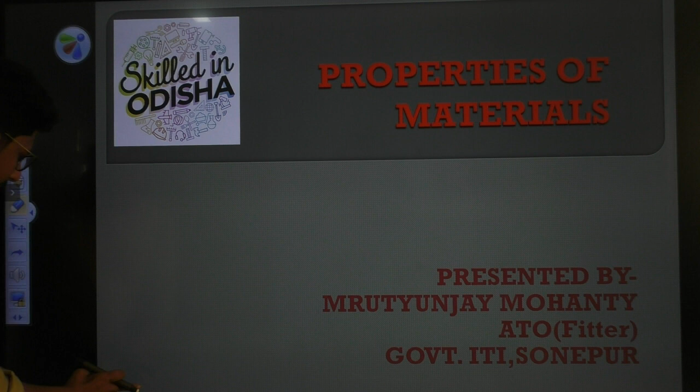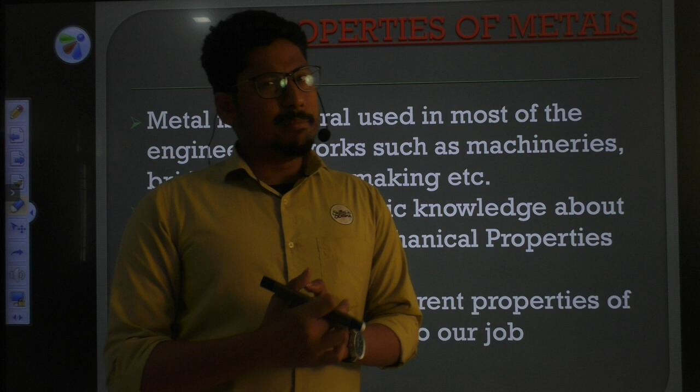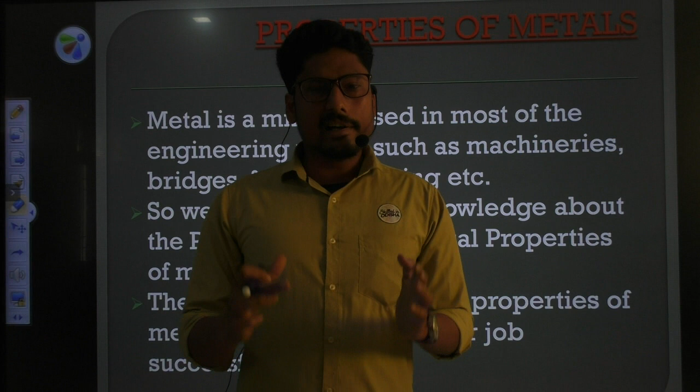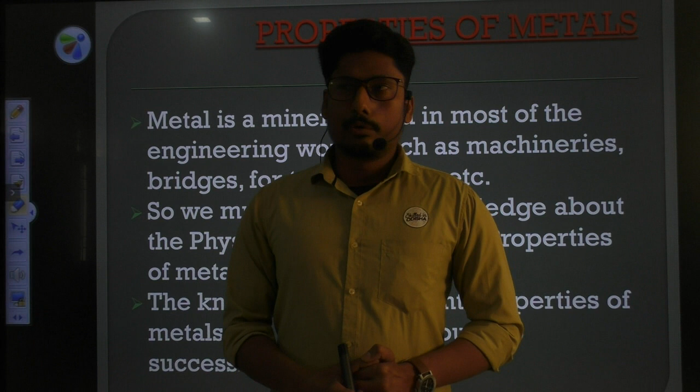Before going to the properties of material, first we have to know what exactly a metal is. A metal is a mineral used in most engineering works - bridges, structural applications, fabrication work. In all fields, we use these metals as important applications in engineering. So the knowledge about metals and their properties is very much essential for a student, a trainer, a trainee, to clarify all doubts regarding the engineering application of material.

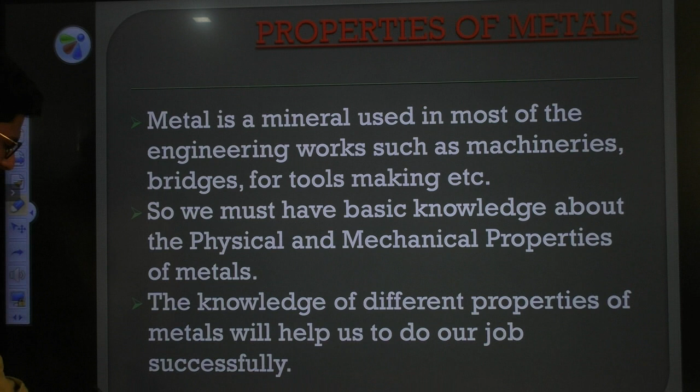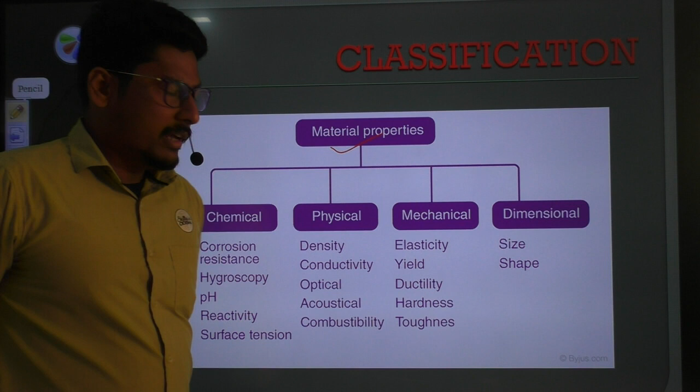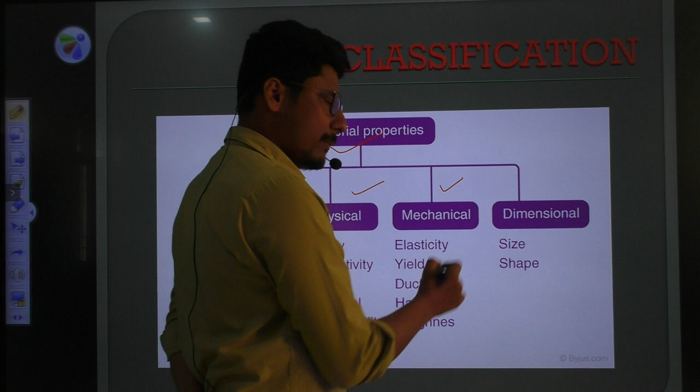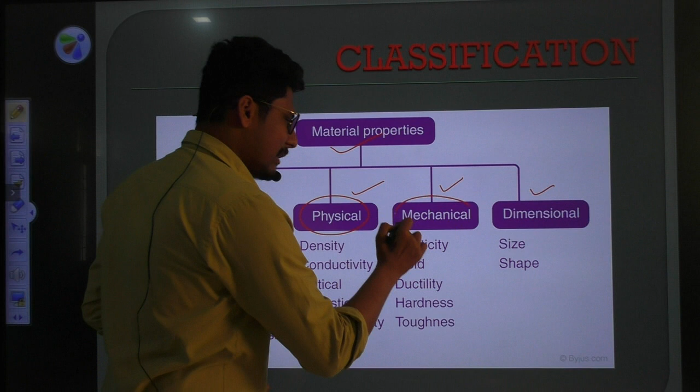So let's come to the important classification of properties. Properties of materials are classified into 4 important categories: chemical properties, physical properties, mechanical properties, and last but not least, dimensional properties. In our subject we deal with all these properties, but in the specialization of fitter trade, we are very much concerned with physical properties and mechanical properties. So in this presentation, I will discuss all the physical properties, then we go for mechanical properties.

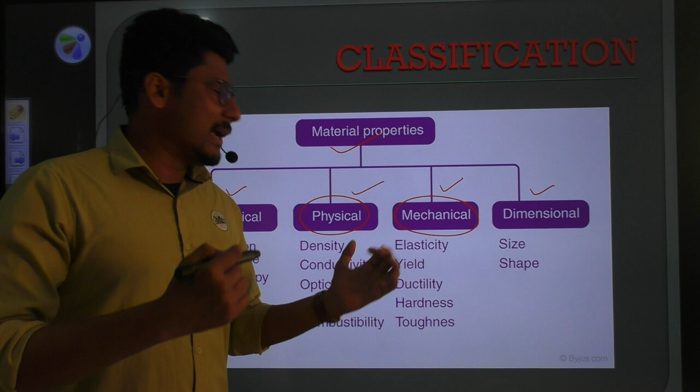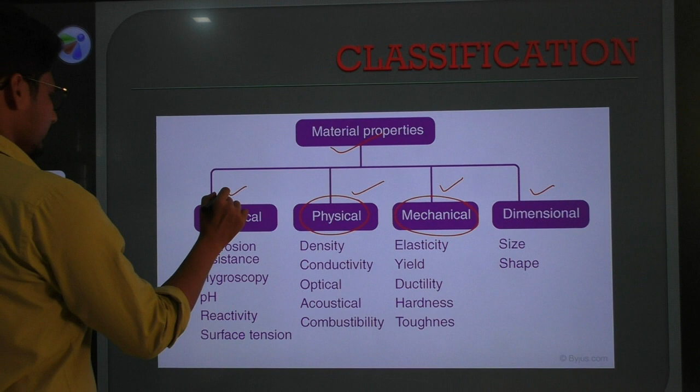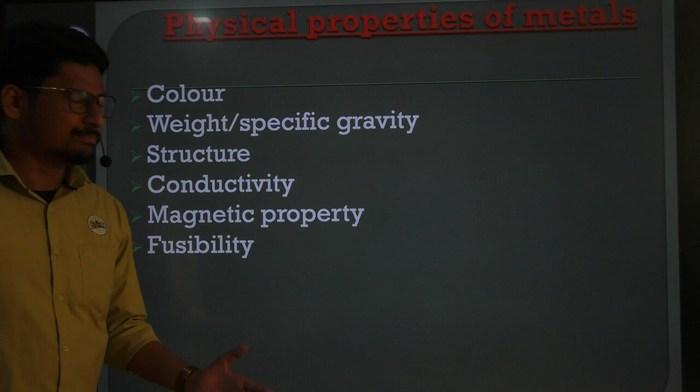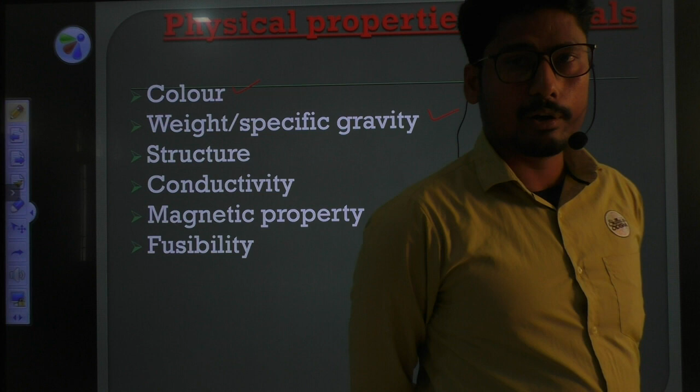So let's come to some physical properties. Some important physical properties are: number one is color, second is weight or specific gravity, third is structure, fourth is conductivity, and fifth is magnetic properties and fusibility. Let's discuss these properties one by one.

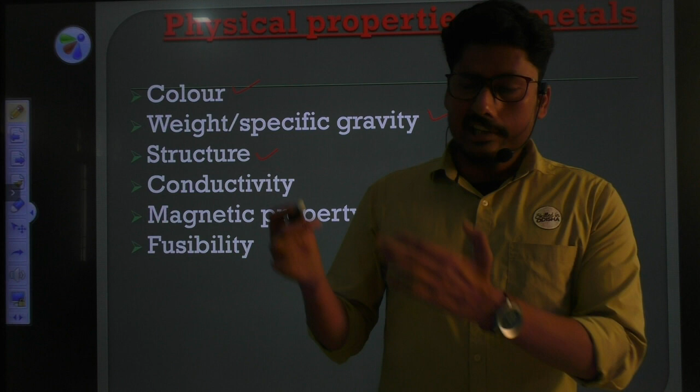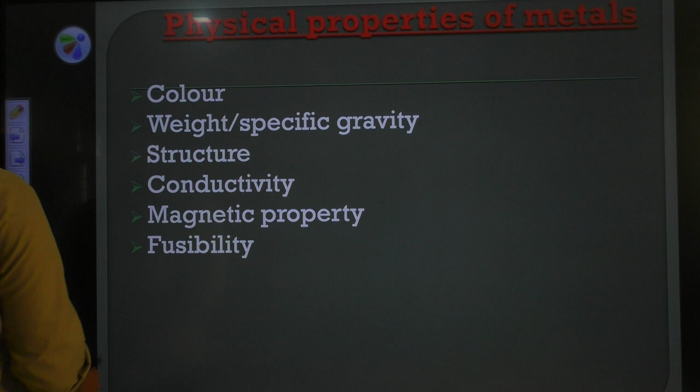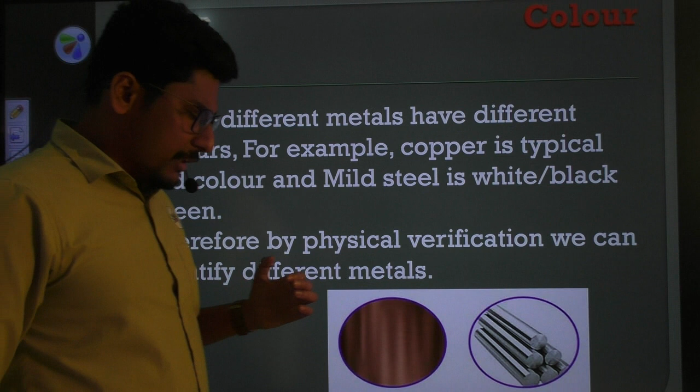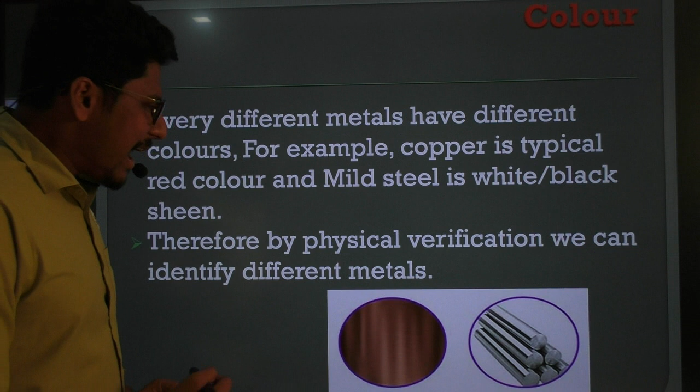First, come to the important property which is color. That means different materials possess different colors. You can see the color of copper compared to the color of mild steel. So according to the color, you can identify the material. This is the main theme behind this property.

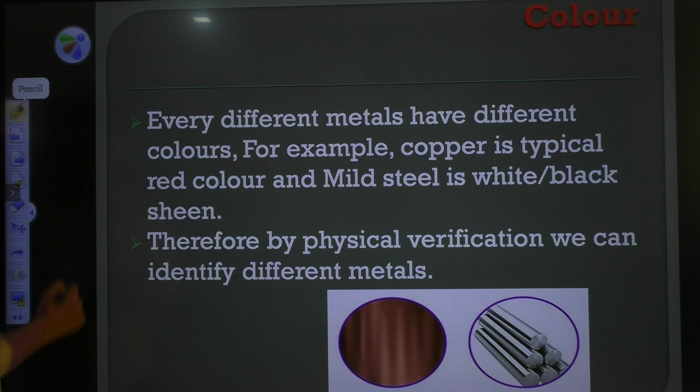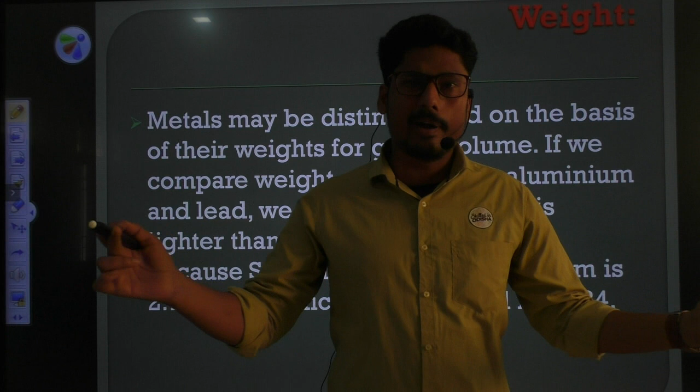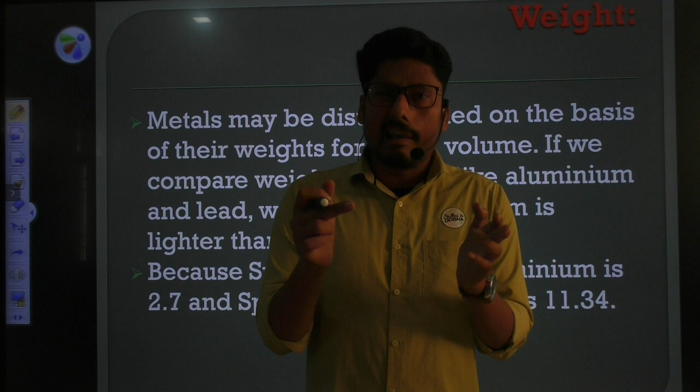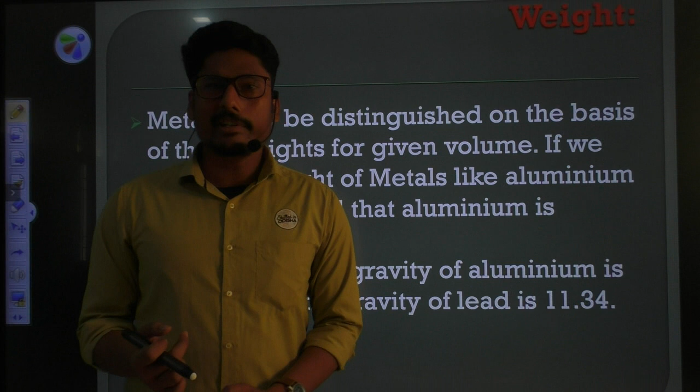Next, come to weight. The material may be distinguished or classified according to weight. You can compare aluminium and steel - aluminium is quite lighter than steel. So you can identify the material according to their weight. Why is aluminium lighter than steel? The main reason behind this is specific gravity - the specific gravity of aluminium is quite lower than that of steel, so it is lighter than steel.

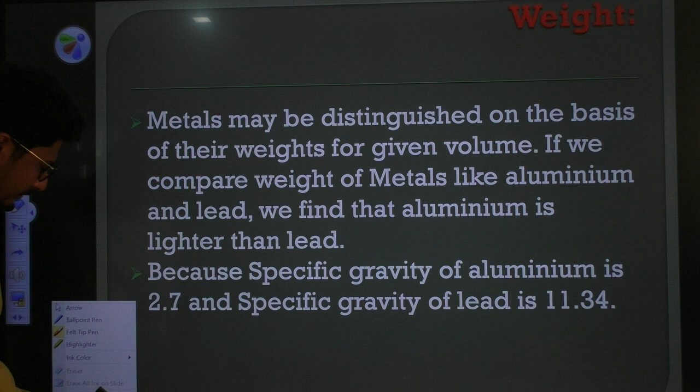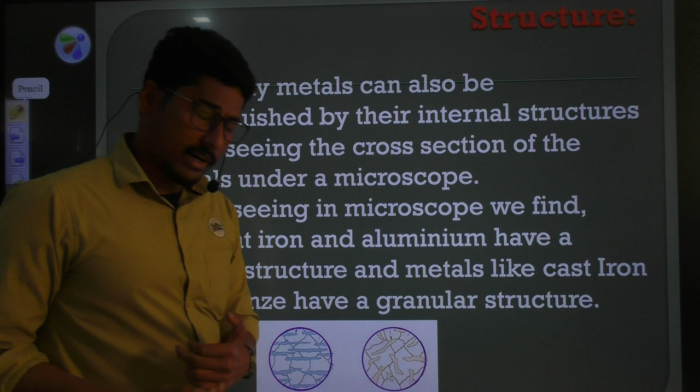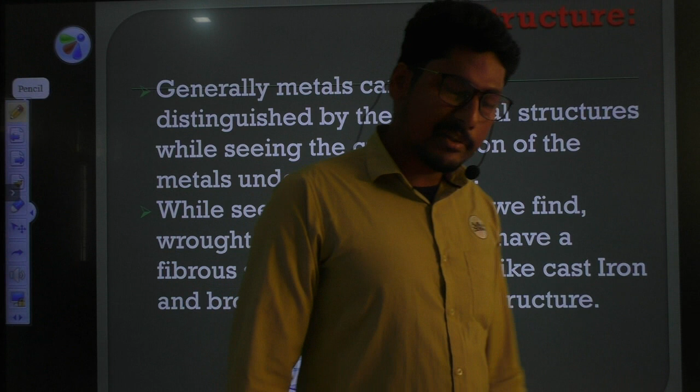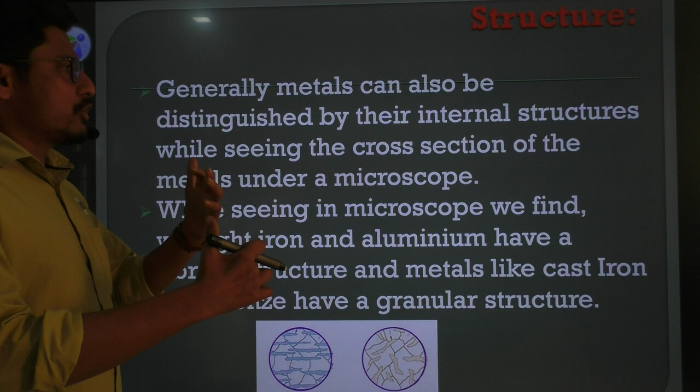Next comes the important property called structure. In microscopic view, you can find that the internal crystal structure of material is different - different materials possess different crystal structures. For example, in case of wrought iron and aluminium, it is fibrous structure, but in case of cast iron, it is granular structure. This granular or fibrous structure can be viewed by microscopic view only. So according to structure, classification of material can be done.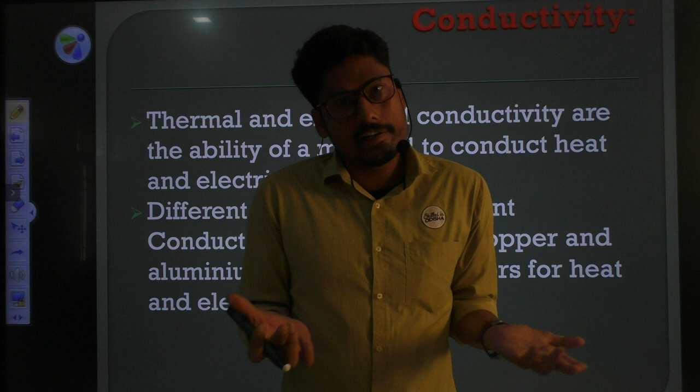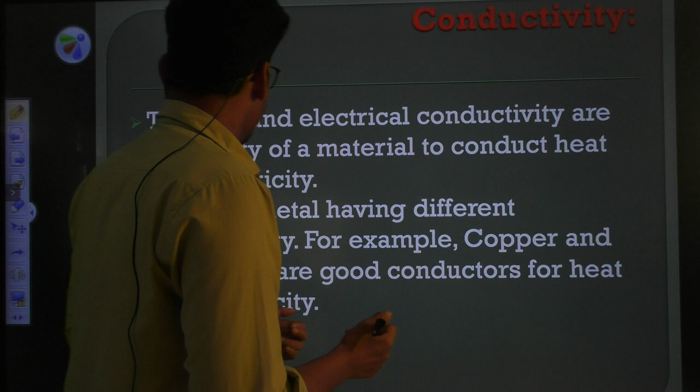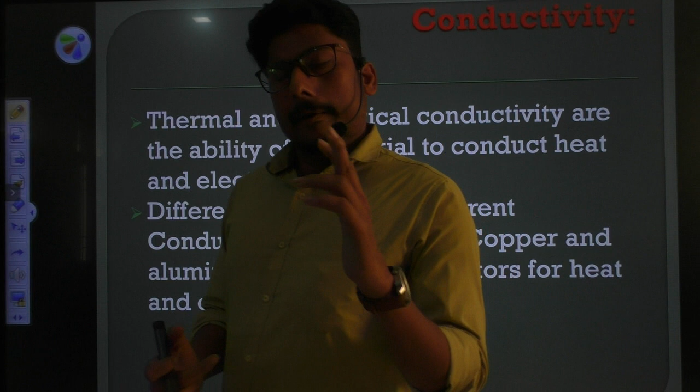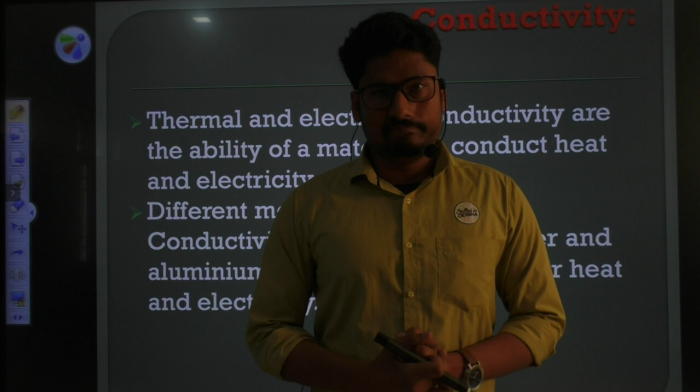Next come to the important property which is conductivity. The metal can be a conductive metal or non-conductive metal, meaning it can conduct heat or electricity. Thermal and electrical conductivity are the ability of material to conduct heat and electricity, and materials are classified according to their conductivity. For example, copper and aluminium are good conductors of electricity, while others are very poor conductors of electricity.

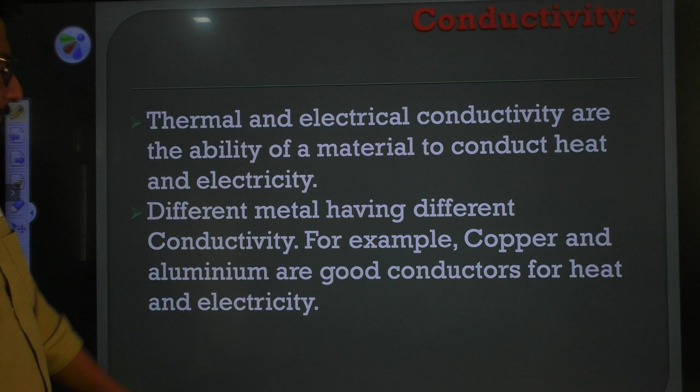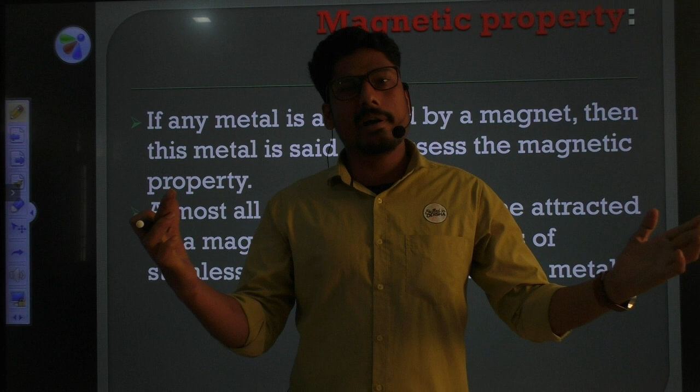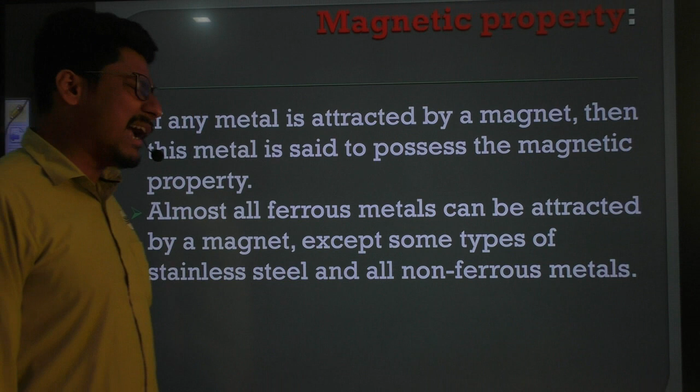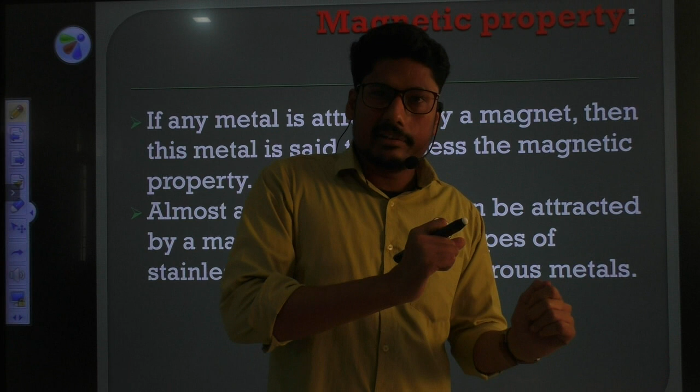Next come to the property called magnetic property. Some metals attract towards the magnet, and some do not. If a metal attracts towards the magnet, then it has magnetic properties; otherwise it does not. Almost all ferrous metals are attracted towards the magnet - in ferrous metal, iron is the basic constituent. So all ferrous metals are magnetic in nature, but non-ferrous metals cannot attract towards the magnet.

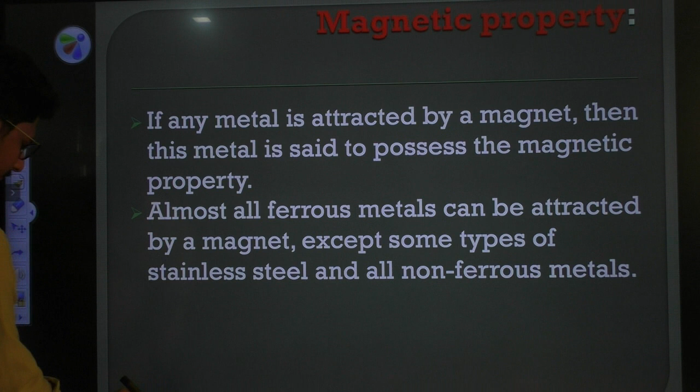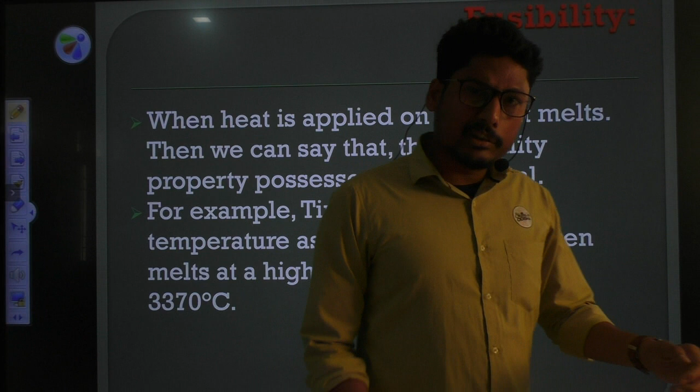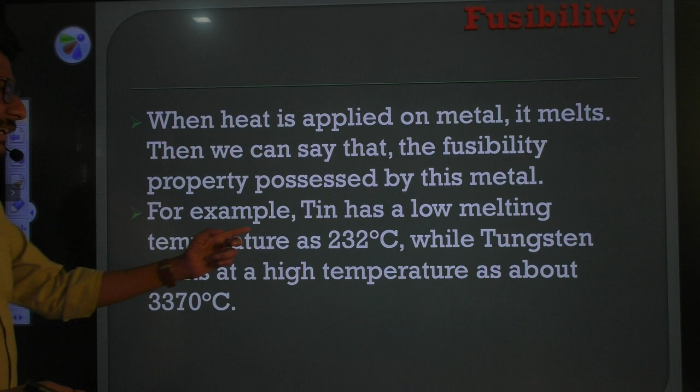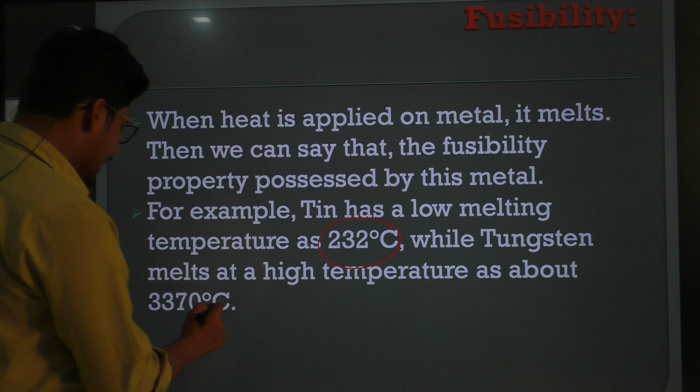Next come to the important property called fusibility. When heat is applied on metal, it melts. But the important phenomenon is that some metal has a lower melting point and some has a higher melting point. For example, tin has a lower melting point temperature, about 232 degrees Celsius, while tungsten has the highest melting point temperature, about 3370 degrees Celsius. So fusibility property decides how the material melts and how it catches fire.

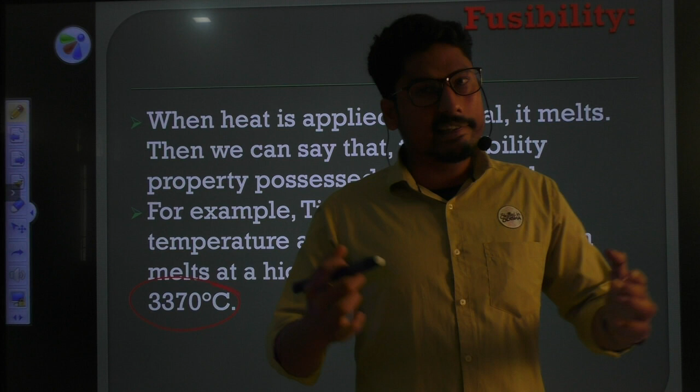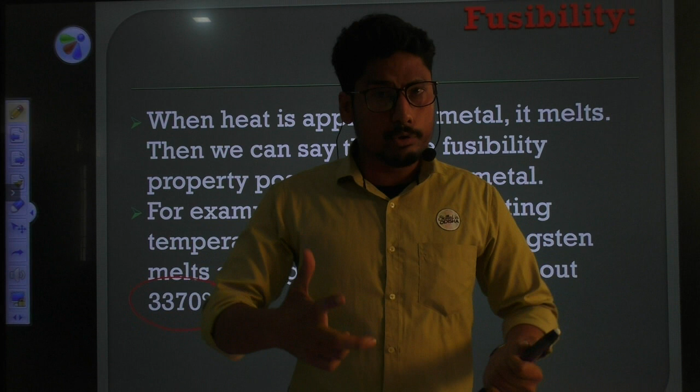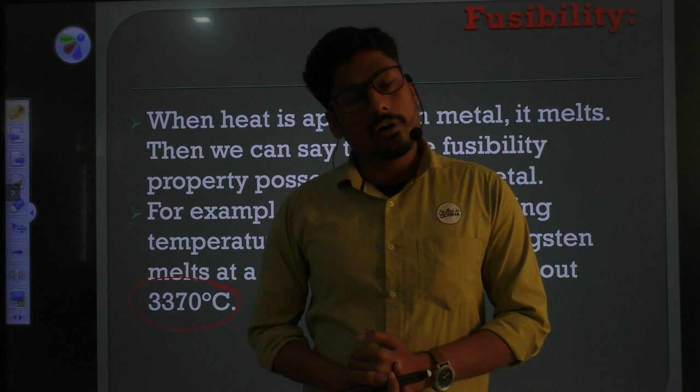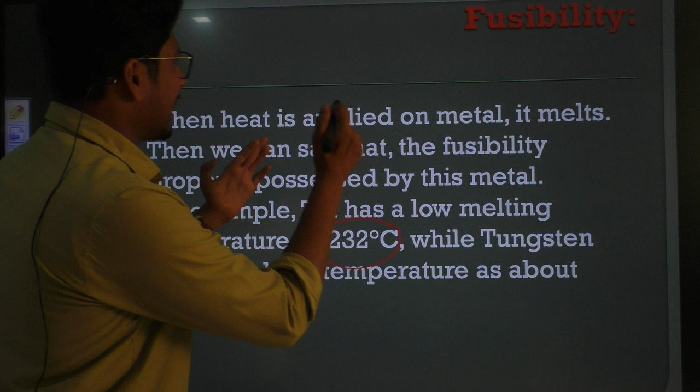Fusibility is the ability of a material to fuse. If a material has good ability to fuse, then it is best suited for casting and welding processes. If the fusibility property of a material is very good, it can be used for casting process - all material which is casted has good fusibility properties. So these are all the physical properties of metals.